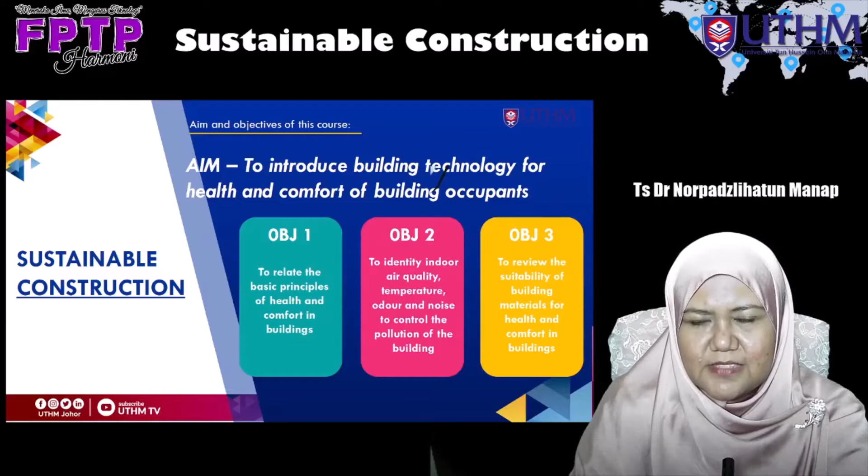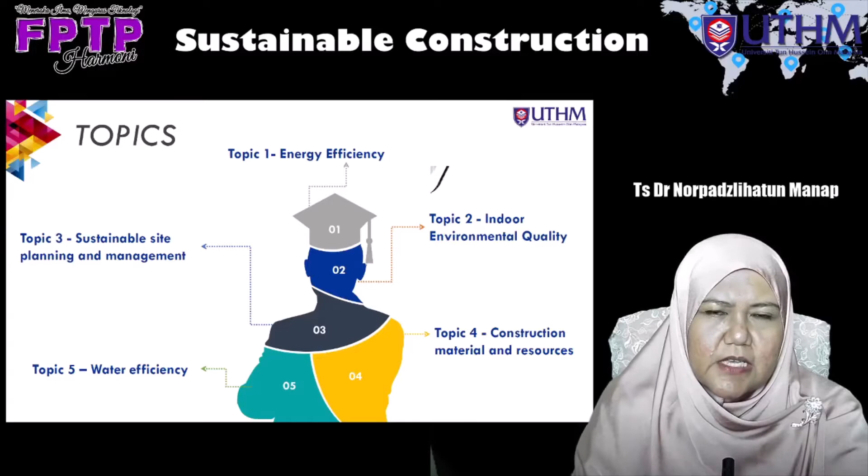So, in order to achieve those 3 objectives, we are going to cover 5 main topics. First is energy efficiency. Second is indoor environmental quality. Third is sustainable site management, site planning and management. Fourth is construction material and resources. And last but not least, the fifth topic, which is water efficiency.

So, when I talk about sustainable construction, what do I mean? Sustainable construction can be defined as the process to build in a way that is socially, economically, environmentally, functionally, and aesthetically balanced, to meet today's needs and to provide and conserve resources for future generations.

So that is why the quote in the first minute of this course is really relatable to the definition of sustainable construction that led me to do this course online. Whatever we are doing currently will affect the way how we live in the future. So in construction perspective, whatever we build today will also affect the lives of those who live in the future.

In my slide, you can see 3 pictures. These 3 pictures are actually the pictures of our own skyscrapers, the Petronas Twin Towers, which was built early in the 1990s. At that point in time, I was like 13 years old.

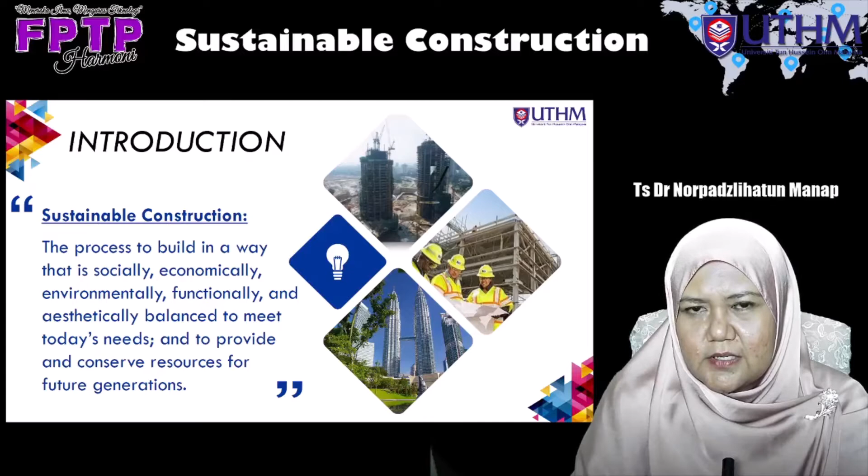So this is the kind of building we should take as an example whenever we want to build any facility.

The main aims of construction are many, but commonly in construction we focus on time, quality, cost, health and safety, and environment. So to build sustainably, we need to make sure all these 5 aspects, or 5 aims, of construction can be met.

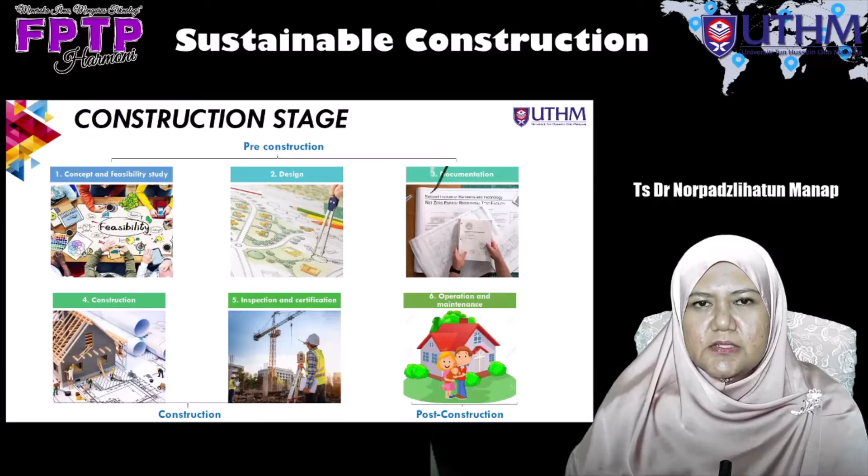Construction has 6 stages that can be divided into 3 main stages. The first is pre-construction, which covers the concept and feasibility study, the design, and the documentation. The second stage is construction stage, which covers the phase of construction, inspection, and certification.

The third stage is post-construction, which includes operation and maintenance. All these 3 stages of construction - pre-construction, construction, and post-construction - should be finished before handover of the project, and will continue for the duration of time stipulated in the contract.

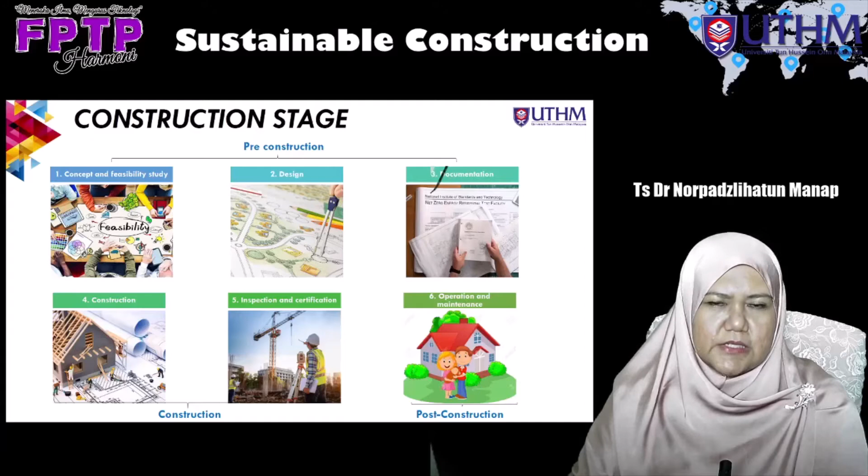What you can see in my slide right now is statistics of our local construction industry. This is a report published by the Department of Statistics Malaysia on 11th of May 2021 regarding the GDP, the gross domestic product, which shows the economic stability of our country for the first quarter of 2021.

As you all are aware, we are still facing the challenges of COVID-19. As you can see, we have a negative 0.5 contraction of GDP in the first quarter of 2021.

These numbers have actually been faced by our country 2 times before this, during economic recession in 1998 and in 2009. So a similar situation has been faced by us, where we are facing a downturn economic situation.

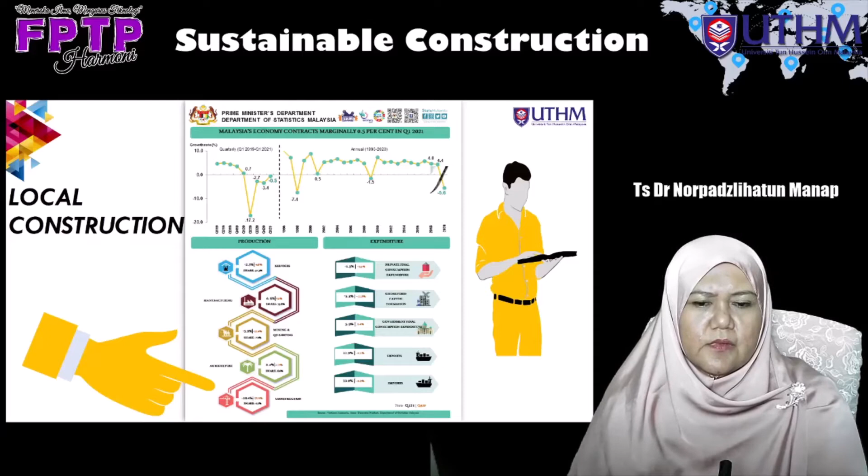So the construction industry is facing the same, where we have negative 10.4% of development compared to the previous quarter. The detail is as you can see here.

The amount for construction work done in the first quarter is RM31.4 billion, but this is actually less than what we used to have in good days before COVID times. But what you can see here, we have actually grown quite a good number compared to the fourth quarter of 2020, where at that time the value of construction work done was negative 14.2%. Now the first quarter is negative 10.5%.

So it shows less than 5% of increment compared to the previous quarter. It shows positive development, but it's still slow.

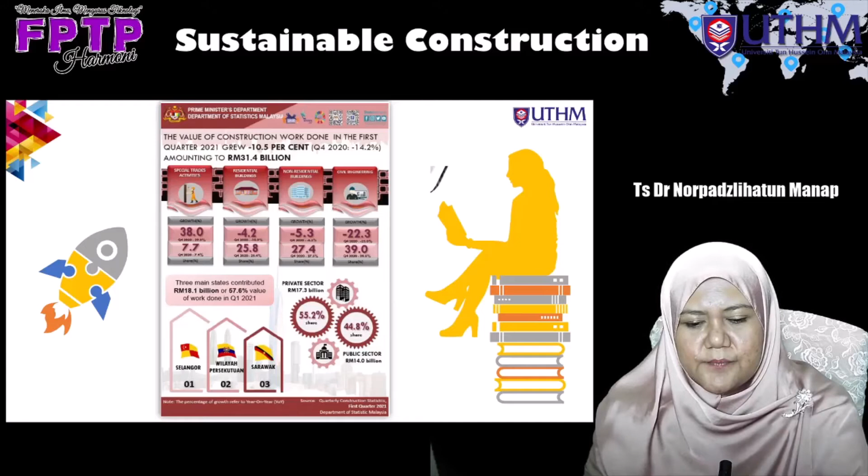So here you can see how our local construction industry, the health of our construction industry during COVID time, has been affected. It can be said that it affected us all.

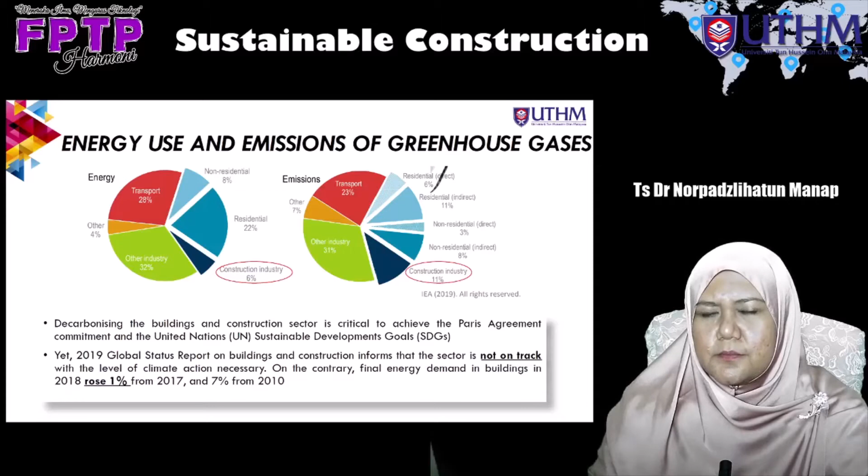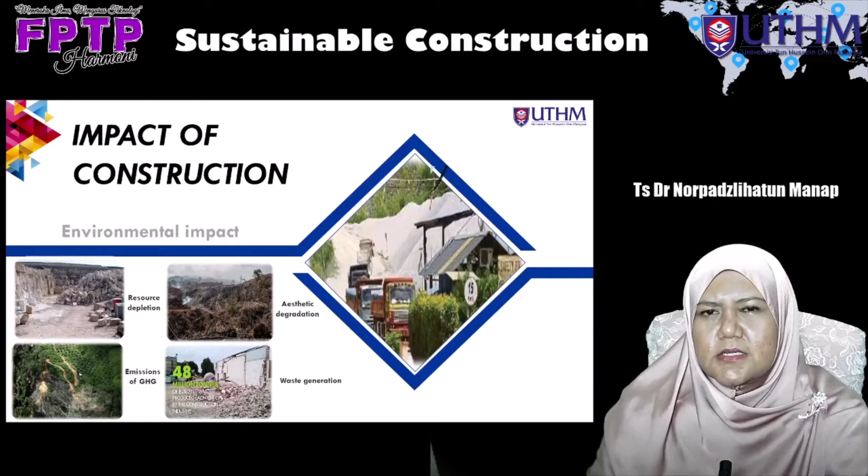What is the impact of construction, you may say? We can look at the impact of construction from three perspectives. The first perspective is environmental impact, which we can see from our surroundings whenever we are on a project site. Whether we want to take a hit or not, there's something else that needs to be considered. But commonly, the impact of construction we can usually see in our environment.

One of the impacts is resource depletion, aesthetic degradation, emissions of greenhouse gas, and also waste generation.

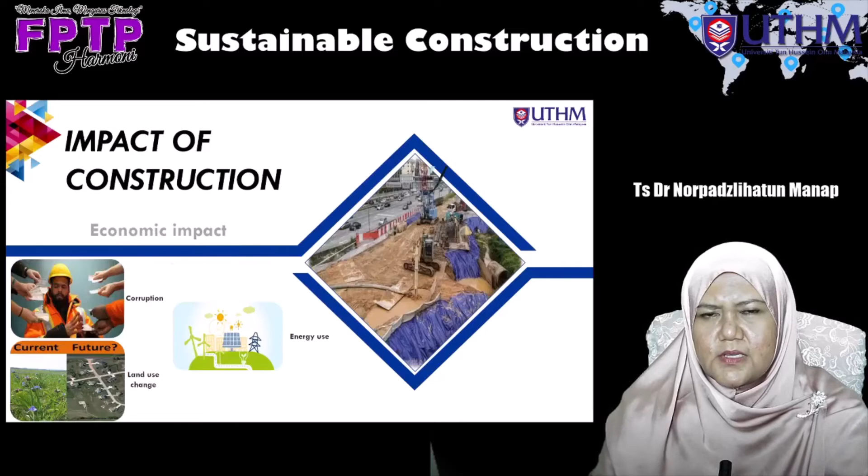The second aspect of the impact of construction we can see from the economic impact. One of the impacts is corruption in construction, land use change, and also energy use.

Last but not least, the third aspect of the impact is social impact. We can see the impact of construction through the disruption of communities, safety, building sickness syndrome, and reduced standard of living. These are the impacts of construction.

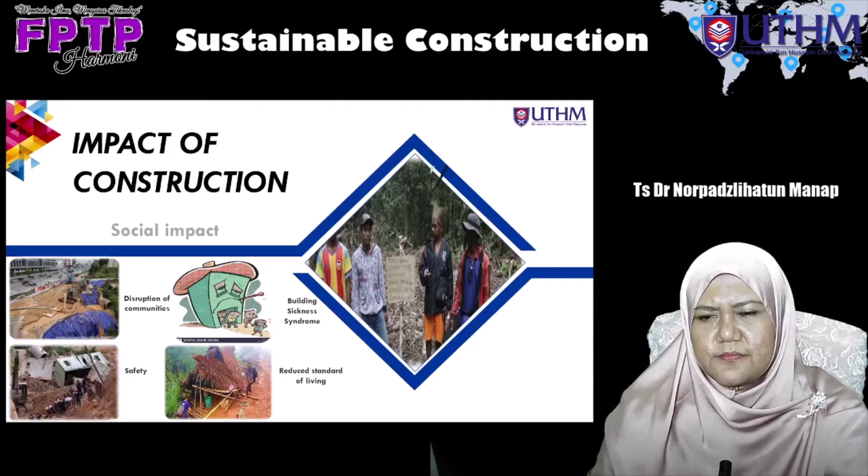So, in order to reduce the impacts of construction from those three aspects, we need to know the principles and strategies so that we can better manage all these impacts.

So there are three principles that will involve many strategies to help us do sustainable construction. The first principle is resource management. The second principle is life cycle design. And the third principle is design for human.

So, in order to apply the first principle, resource management, we have strategies. For example, efficient use of energy, efficient use of water, efficient use of materials, and efficient use of land.

If we opt to apply the second principle, which is life cycle design, we can apply strategies such as pre-building strategies, building strategies, and post-building strategies according to the construction stage.

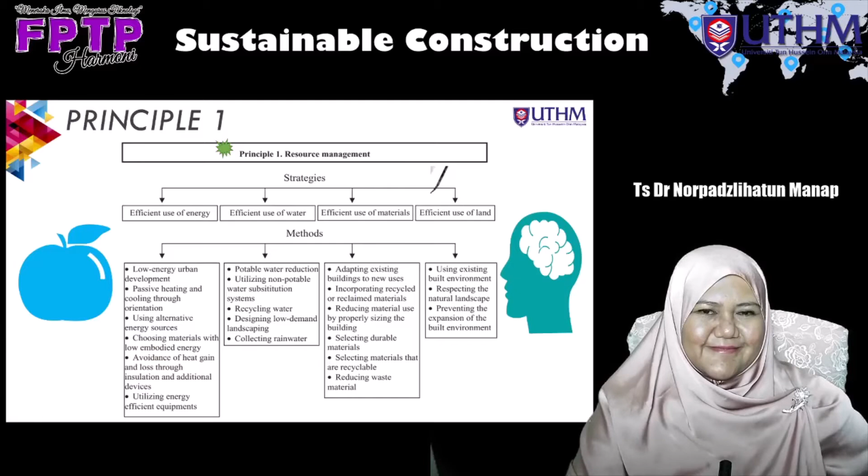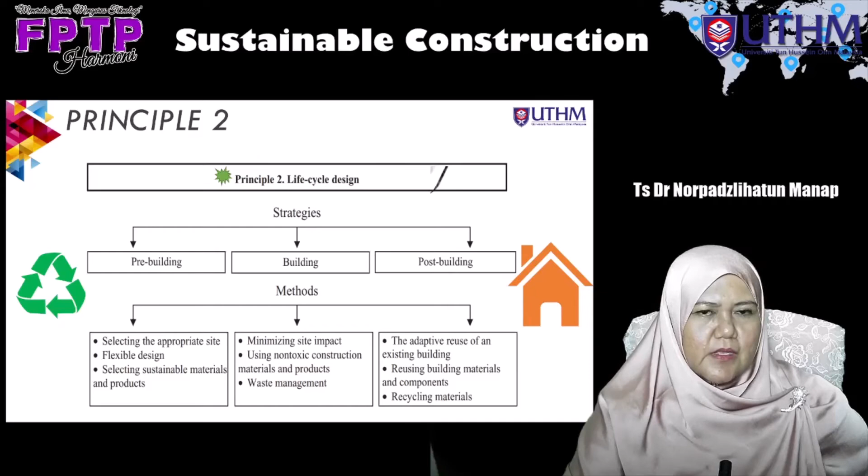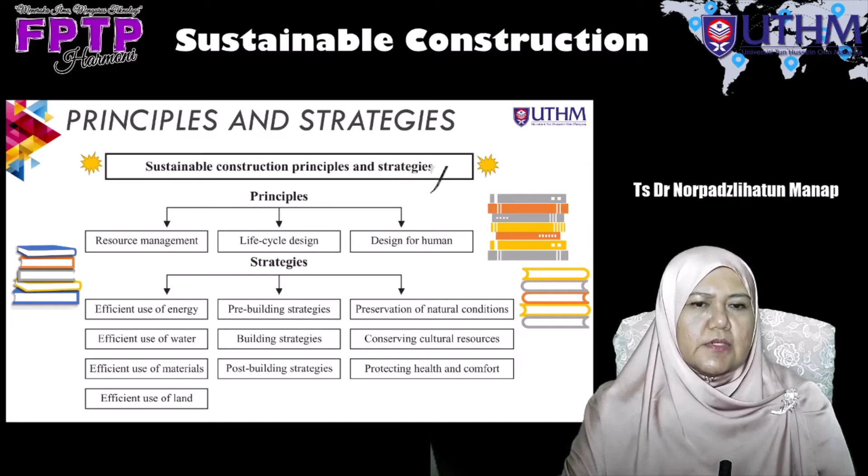So basically, you have been exposed to the principles and strategies to apply sustainable construction. The principles are resource management, life cycle design, and design for human. There are strategies and respective methods that I've shared with you on how to construct sustainably.

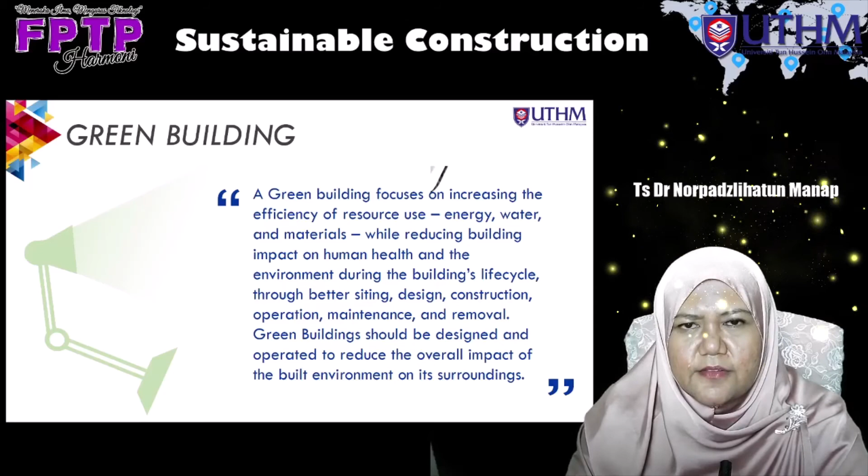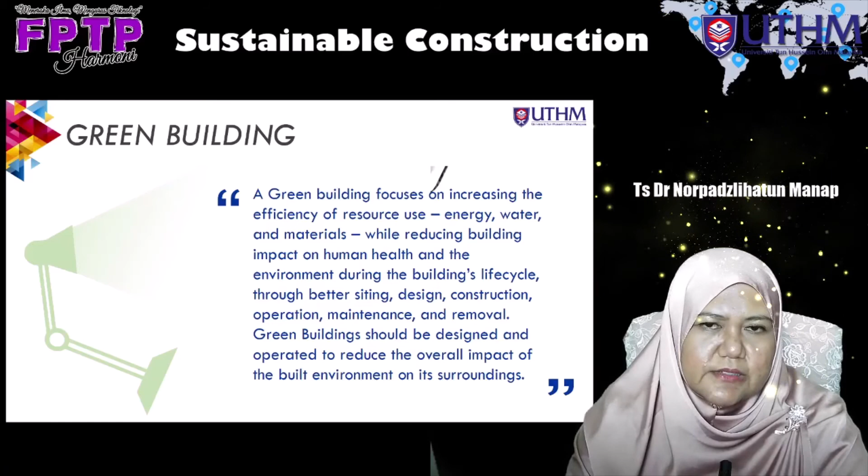Whenever we are talking about sustainable construction, we cannot run from talking about the green building. What is the definition of green building? A green building focuses on increasing the efficiency of resource use - energy, water, and materials - while reducing building impact on human health and the environment during the building's life cycle through better siting, design, construction, operation, maintenance, and removal. Green buildings should be designed and operated to reduce the overall impact of the built environment on its surrounding. That is the definition of green building.

Green buildings can improve people's health and well-being. So by having green building, you can help our nation to achieve the third SDG, which is good health and well-being.

Green buildings can use renewable energy, becoming cheaper to run. The benefits of having a green building is you can help our nation to achieve the seventh SDG, which is affordable and clean energy.

Building green infrastructure creates jobs and boosts the economy. So by declaring your project as a green building, you can help increase the decent work and economic growth, which is the 8th SDG.

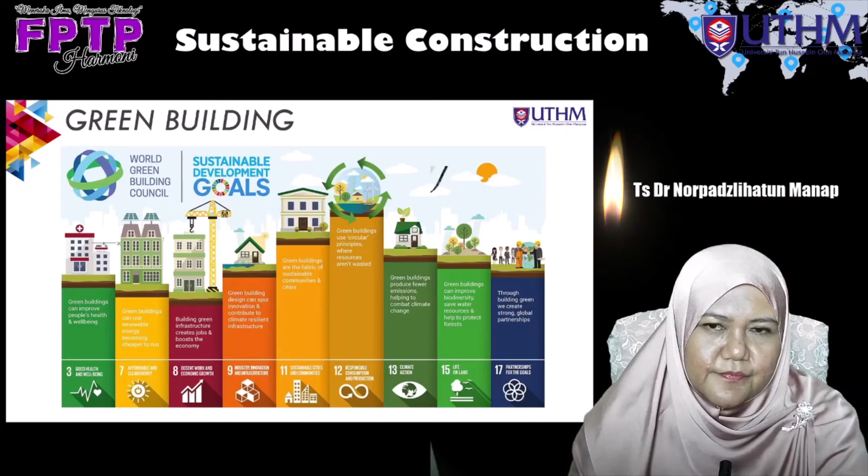First is in the US, which has Leadership in Energy and Environmental Design, also known as LEED. The second one is Green Star, that has been used in Australia. The third one is Green Mark Singapore. And last but not least, our country itself - the Green Building Index.

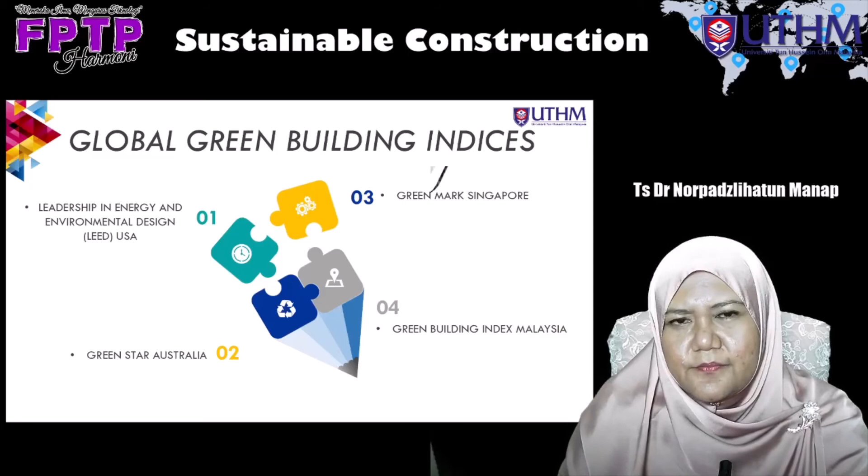So these are global green building indices, which can help companies involved in the construction industry achieve global green building status. If they have the green building status, they will get benefits.

So there are differences between each of these green building indices in terms of the assessment criteria. As you can see, the number of criteria is actually different. LEED USA has 6 assessment criteria. Green Star Australia has the highest number, meaning much more detailed and comprehensive, with 9 assessment criteria. Singapore's Green Mark has 5, and in our own country we have 6 main assessment criteria in our GBI. Although the numbers differ, they basically cover the same aspects as discussed in our principles.

In LEED USA, the 6 assessment criteria are sustainable site, water efficiency, energy and atmosphere, materials and resources, indoor environmental quality, and innovation and design or construction process. That is the assessment criteria used by LEED USA if anyone wants to declare their construction project or building as a green building.

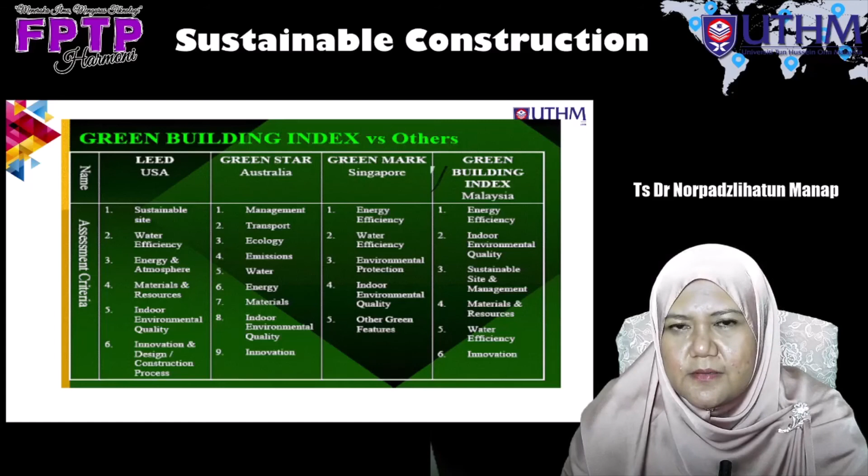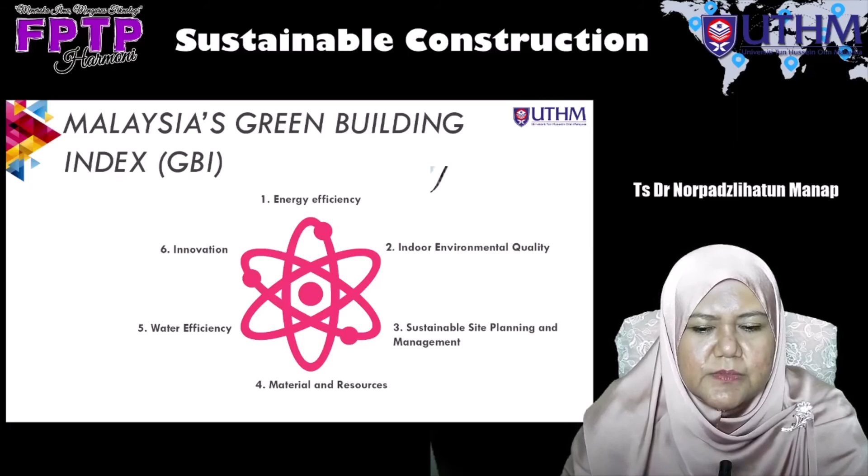So that's what you can see here. We have 6 GBI criteria. For any construction company that wants to declare their building as a green building, they need to be assessed using these 6 criteria: energy efficiency, indoor environmental quality, sustainable site planning and management, material resources, water efficiency, and innovation.

In detail, anyone in the construction industry who wants to declare their building a green building needs to fulfill this assessment criteria. The first is energy efficiency. They need to show that their design and practices can improve energy consumption by optimizing building orientation, minimizing solar heat gain through the building envelope, harvesting natural lighting, adopting best practices in building services including use of renewable energy, and ensuring proper testing, commissioning, and regular maintenance.

The second assessment criteria is indoor environmental quality. The construction company needs to show they can achieve good quality performance in indoor air quality, acoustics, visual, and thermal comfort. This involves using low volatile organic compound materials, applying quality air filtration, and proper control of air temperature, movement, and humidity. That is the second assessment criteria for any construction company seeking green building status in Malaysia.